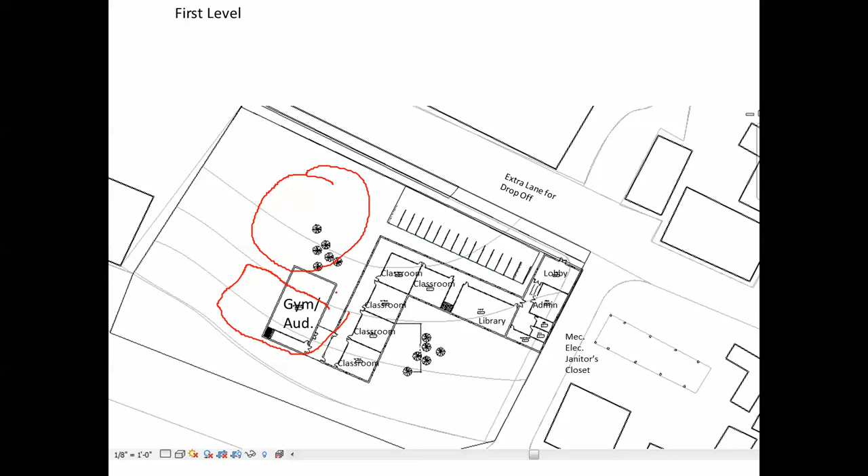First off, one thing I noticed is that the gym, to me, seems like it might want to go like that, and then creates this beautiful space. And when you do your trees, you can kind of do your trees in a way that creates space. So you've kind of got a really nice space along here. So this becomes this great outdoor space, or more like a courtyard. So there's probably some pretty heavy foliage there.

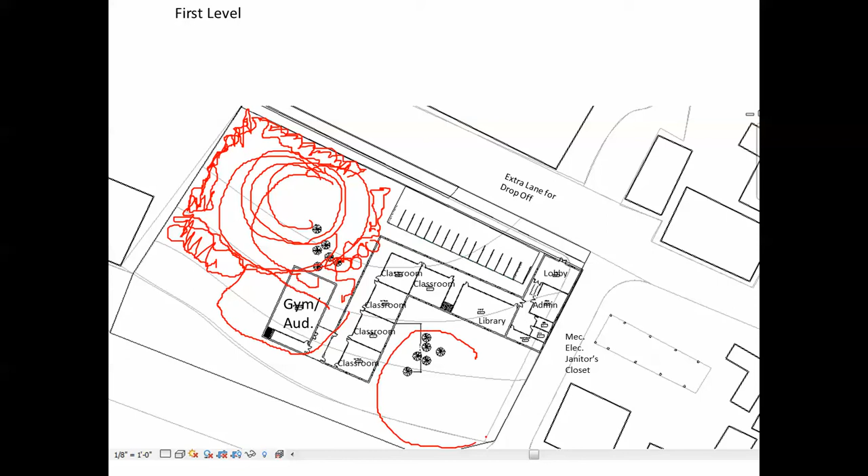Remember, you can use trees like walls, and you can use landscape as three-dimensional space. And that means now you have your two courtyards. Same thing here. You might want to use that. You might want to think about that, right? So I think making this go that way is actually pretty helpful. And then you still have room for your pond down here, so the rainwater can kind of find its way down into here, which is pretty good.

As for this guy right here, the problem is that if you're doing your bus drop off here, these guys will be able to back in and out, and if that's the case, you don't really need to take that much space. You can just take it right up to the edge. However, what I might consider doing is moving the whole building this way 20 feet and actually putting in maybe a drop off or parking over here, so maybe cars are on this side and buses are over here. Maybe it cleans it up a little bit.

Now I'm going to go into the site plan. This double courtyard thing is an interesting idea, and it's interesting to see how you played it out. So the only big change there was rotating that a bit like that. Now, one thing that's interesting here, I probably would consider a couple things. I think this is 2 floors, right? So right now you've got a fire stair here, which you could just cut off like that, by the way. You don't have to take it all the way to the back.

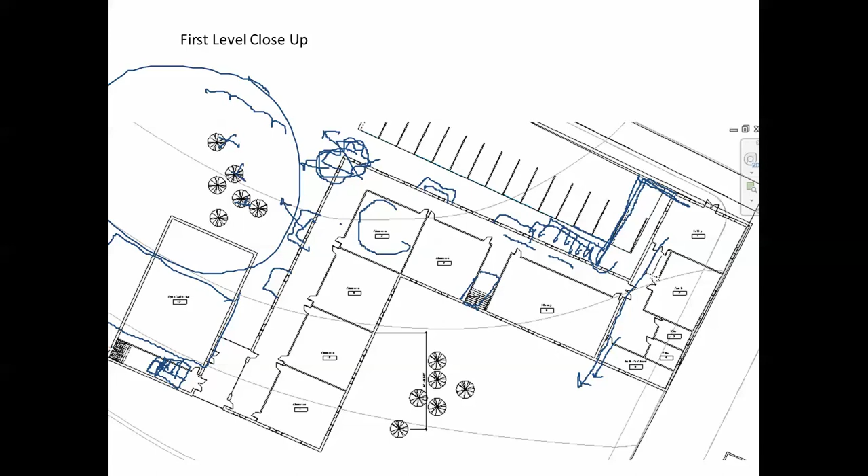So this room might want to be, now I have to go back. Yeah, you have the same problem here. I mean, you can have glass on the inside walls, but that's still not really ideal. So I have to think about that a little bit. So you pretty much put a lot of your specials upstairs. What I would consider doing is maybe moving, maybe this is library.

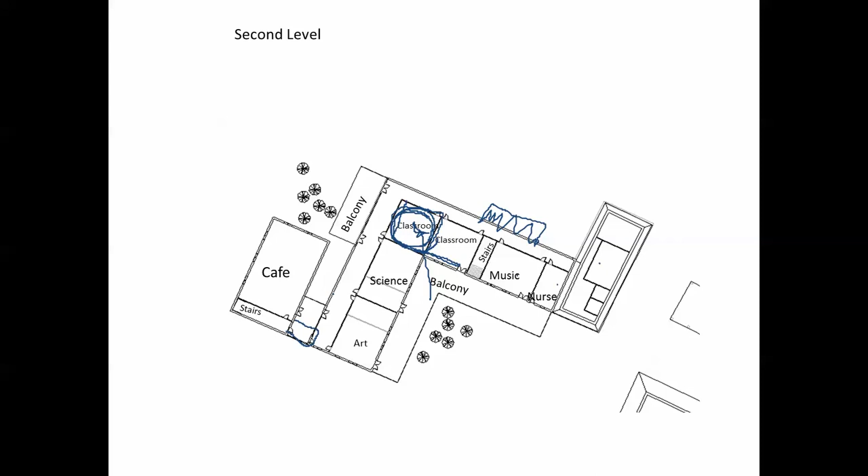Hmm, not sure what to do there. This looks a little funky. Oh, and you have your cafe on top of the gym. That won't work. Cafe probably needs to be on the first floor next to a kitchen.

So what I would do maybe is I would almost bring the cafe out, or the cafeteria out, as an element that looks out onto this courtyard, and then I would really strongly define that edge of trees. And maybe I can sneak in a kitchen building. Maybe that's what you need. You need a little kitchen building and loading building that can feed into this cafeteria.

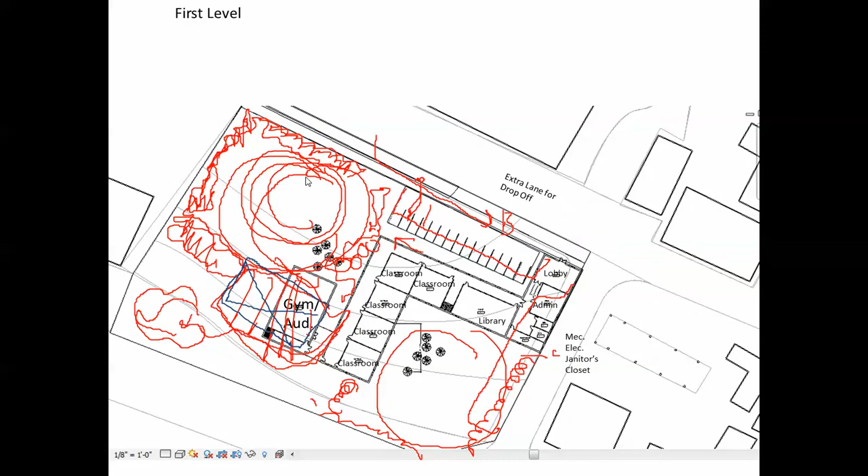And really, the truth of the matter is, you don't really want to put a space on top of a gym because of the double height space, or at least story and a half. So I would consider just letting that be its own expression. See, now this comes out like that, and that comes out like that. Starts to make a little bit of an architectural statement. Not bad though. I think you did a good job developing this scheme. I hope you learned something from those comments.

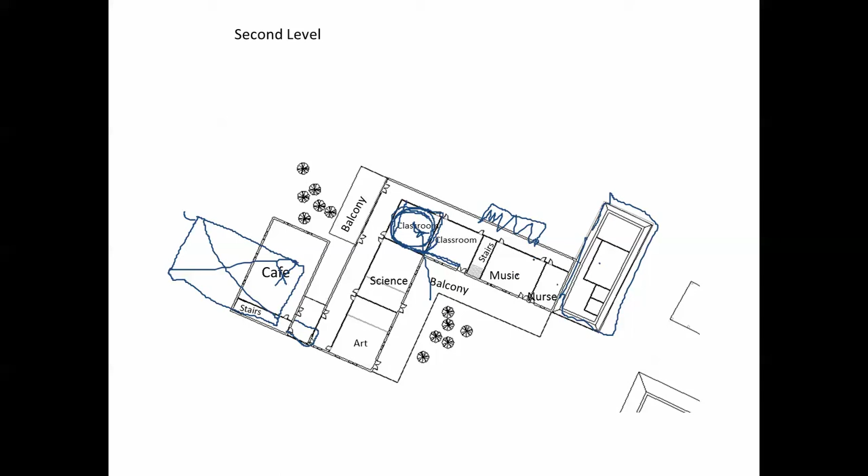And here you really want to kind of begin to think about bringing this guy out here to create that space. You've got that space created. And this would be a good time to put your little gateway element in. So that's good.

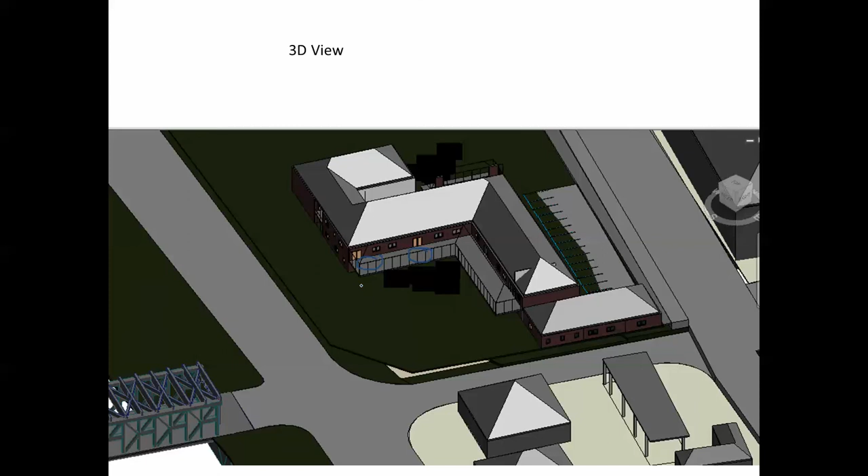I think the balconies are interesting, but you might want to think about what really happens out here. Rather than doing a balcony that's all connected, you might want to think about, I don't know, maybe not having it, or remember also that these balconies are blocking light for underneath there, so it's a little bit of a concern.

As far as the performative one goes, of course the idea here is to have a shape that is as efficient as possible for south facing. However, when the building gets really deep, you have a problem in that you're not really getting the benefit that you would like. Typically what you want to do is have a single loaded corridor.

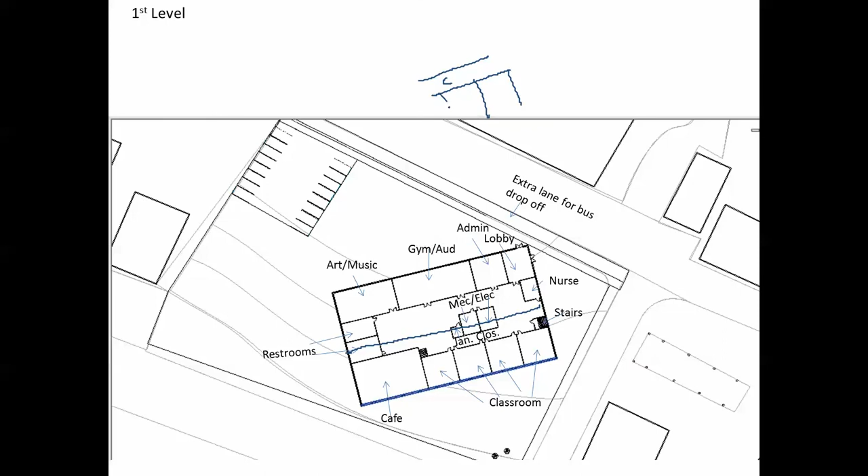Let me just draw a little diagram up here. So you have your corridor, and then you tend to want to have your classrooms off of that and nothing on this side. And so what I was thinking you could probably do is a double building, sort of, forgetting outdoor play space and such. So you have a corridor along the back, and then you have your spaces facing along the front. I'm actually not giving you a very good critique here. Let's see what you got here.

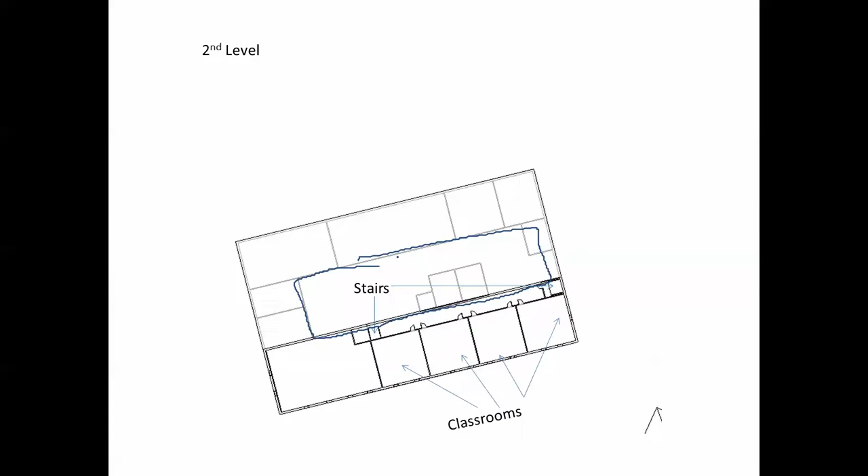So in this scheme, if you can get a double height space somewhere in the middle here, let me see what you have above it. Oh, that is the second level. So what I would do on the second level is consider doing a series of balconies on the inside, forgetting your bathrooms for a minute, so people could look down into the space here. So get rid of those bathrooms, and, forgetting that other idea of the double building, you'll probably have to make your building a little longer.

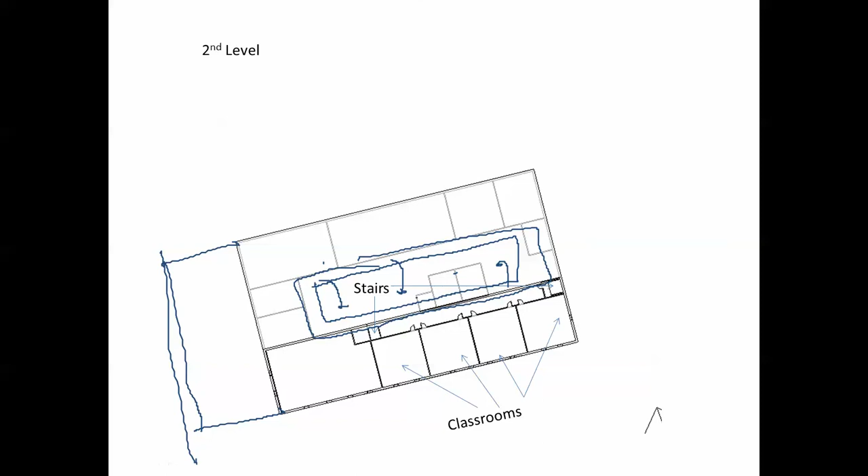Oh look, so you have a corridor here. That corridor can move out to here, and this is open to below, which means that when you're in this space, you can see up above you and into maybe a beautiful clerestory. So in section, going back to the way the building is now, you've got this and this, you've got that, you've got classrooms like that, right? And then you have the opportunity to do clerestories. Remember, we don't do skylights unless you really have to.

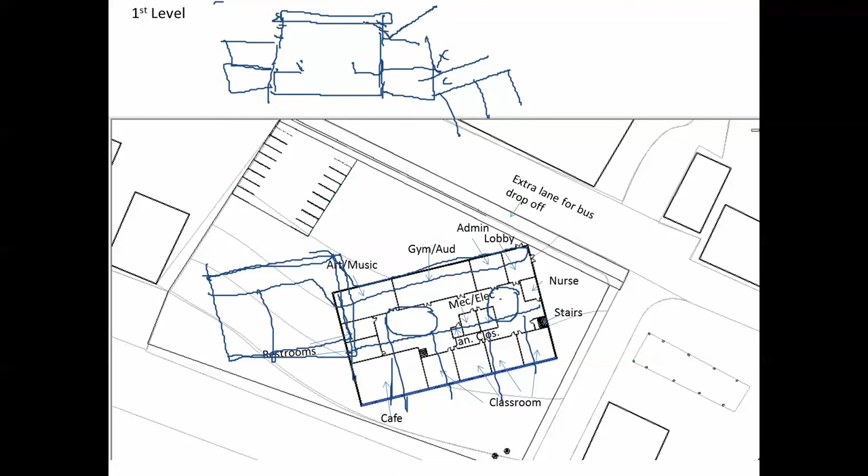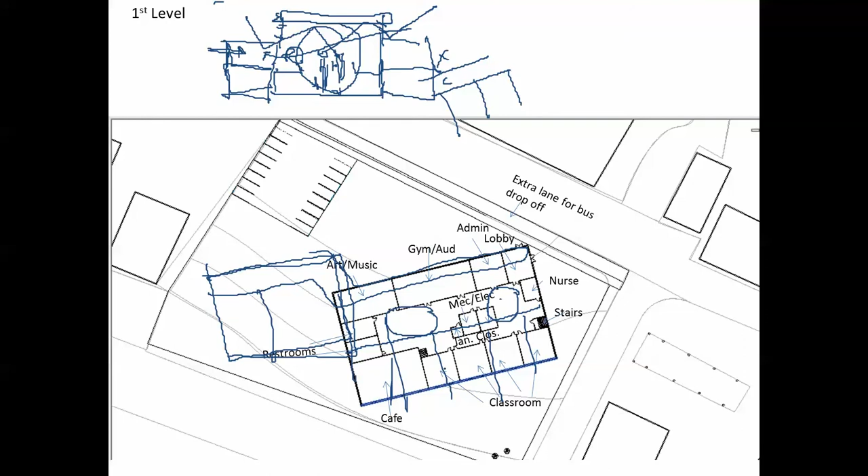So light's going to come in like that and go down to whatever side you're on. And you're going to have this really glorious space. You could put some nice plants and trees in here, really make this like an indoor-outdoor space, which would be very efficient from a performative standpoint because you're getting light from two sides now, right? Borrowed light here, and direct light on that side. So I think there's some potential if you open it up a bit and allow some double height spaces to occur.

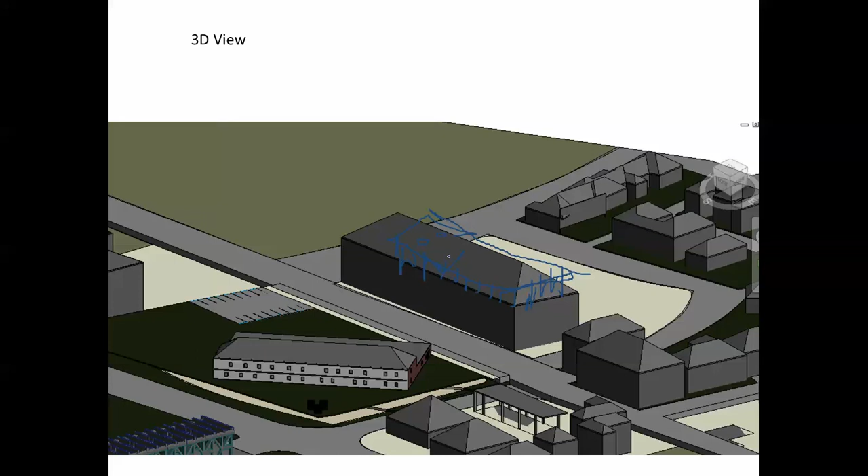Now you have this guy. What I would think about doing here is probably a row of clerestories like that, and then a roof that kind of comes out flat like this maybe. I'm not quite sure. And maybe you have some of those solatubes that can look down into there. Not bad though.

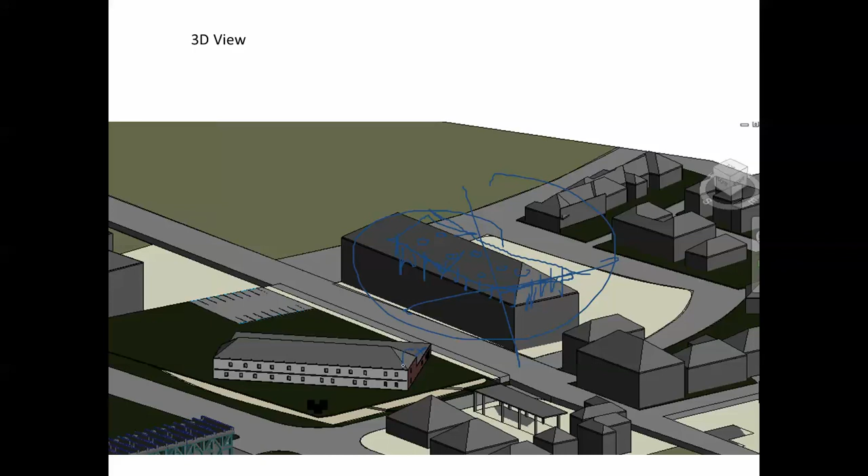Well, now I'm confused. Oh, that's not your building. So same idea here though. This building looks not too exciting. Oh, I see. You only have one story on that side. Why wouldn't you flip that then and have the one story on the south side so that more light can get in? Or this is a big playground, green roof. Not sure. Got to think about this one a little bit more.